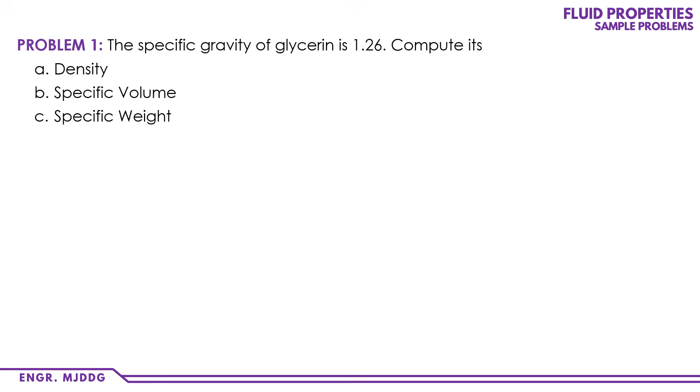So we can write unit weight of glycerin equals 12,360.6 Newton per cubic meter. This is the answer for letter C.

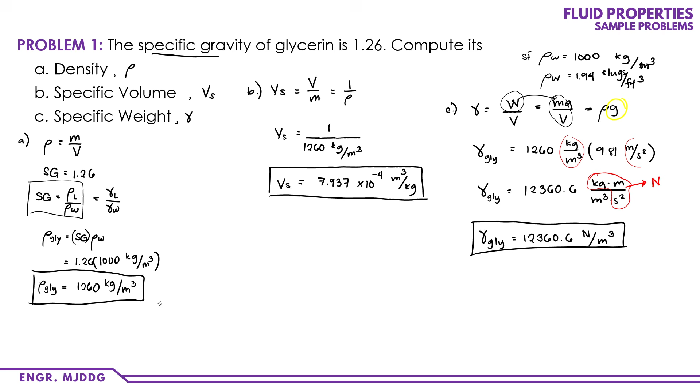Now for number 2: A cylindrical tank, 80 cm in diameter and 90 cm high, is filled with a liquid. The tank and liquid weigh 420 kilogram, and the weight of the empty tank is 40 kilogram. What is the unit weight of the liquid in kilonewton per cubic meter?

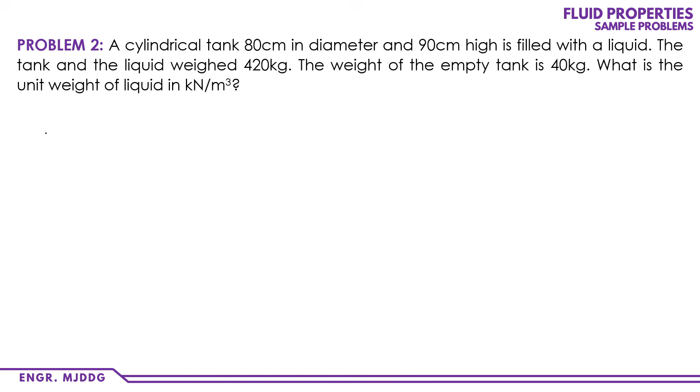First, let's draw our cylindrical tank. The height is 90 centimeter, and the diameter, meaning the full width, is 80 centimeter. Note that when you see the Greek letter phi in our solving, it stands for diameter.

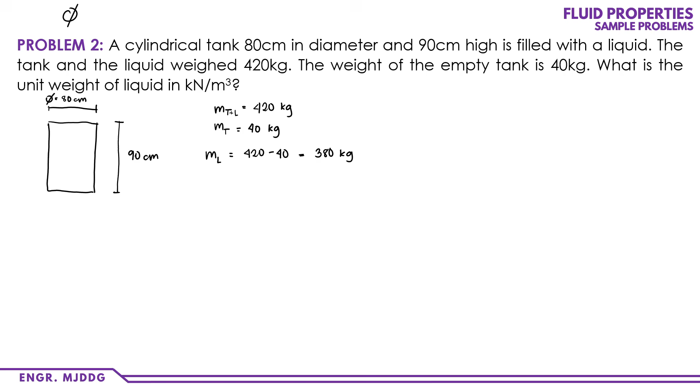Meron tayo ditong volume. Ano ba pinapakuha pala? Unit weight. So ang unit weight natin ay weight over volume. So kailangan natin kunin si volume.

Yung volume ng liquid natin ay, ano ba to? Cylinder. Pi over 4 D squared. So ito yung ating formula for the circle sa baba, di ba? Then ito times natin ng height para maging volume.

So pi over 4 D. So yung d natin, naka-centimeter, gawin pala natin siyang meters. So convert lang natin, cm to meter.

0.8. 0.8 meters. Then ito naman ay 0.9 meters. Okay, so 0.8 squared times 0.9.

So ang V natin dito is, so pag kinumpute nyo, 18 pi over 1, 2, 5. Or...

0.452 cubic meter. Okay, so salpak na natin yan sa formula. Pero kasi yung sa formula natin, weight. Pero alam naman natin na ang weight ay mass times the acceleration due to gravity over V.

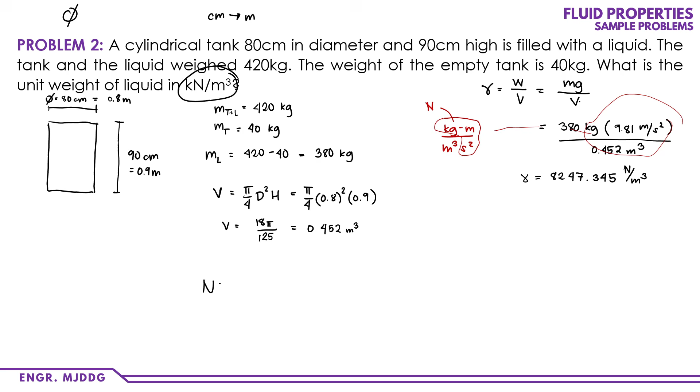So kailangan convert natin si Newton into kilonewton. So ang 1 kilonewton, ang 1 kilonewton ay 1,000 newtons.

So ang gagawin lang natin dito, sulat ko na lang dito sa baba. 8247.345. Ayan, kadugtong niya.

Newton per cubic meter. So sabi natin, pag nagko-convert tayo, yung nasa baba ay yung ika-cancel. So Newton over 1 kilonewton. So 1,000, divide lang natin siya ng 1,000 para maging

8.247 kilonewton per cubic meter. So tinatlo ko na lang yung decimal places. Okay?

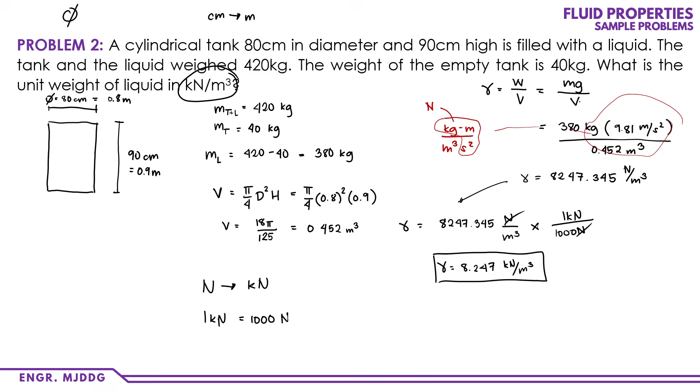Number three, find the mass density of a gas at a temperature of 8 degrees Celsius and a pressure of 190 kPa gauge. Use gas constant equal to 2079 joule per kilogram Kelvin.

So mass density daw ng gas. Ilan na to? Ay wait, napindot ko. So kapag mass density yung pinag-uusapan natin, yung gas, or kapag gas yung pinag-uusapan natin, ano na yung formula natin dito?

Yung sa may ideal gas, naalala nyo ba? Yung ideal gas na formula natin, which is, the density is equals to P abs. Parang sira na tong pentab. P abs over RT. Okay?

Then ang binigay na pressure sa atin is gauge. Pero dito, P abs dapat. Ano yung formula natin to convert gauge into absolute pressure?

So meron tayong P gauge. P abs is equals to P gauge. Parang may nagpipindot-pindot na dito. P gauge plus P ATM or the atmospheric pressure.

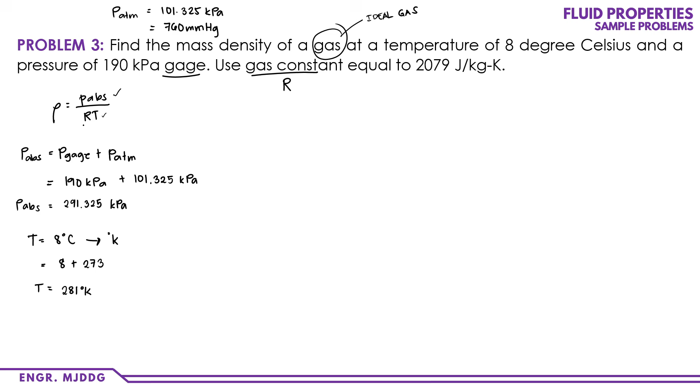Okay, so meron na tayong P-abs, meron na din tayong T, and then si gas constant natin, which is si R, and check natin yung unit, joule per kilogram Kelvin, which is yun talaga dapat yung unit ng R natin. So pwede na tayong magsalpak ng given.

So density is equals to 291.325 kPa. Pero sabi natin sa formula, dapat si absolute pressure ay naka-Pascal.

Kaya magta-times tayo ng 10 raised to 3 para maging Pascal. So alisin ko na to. Magiging 291.325 times 10 raised to 3 Pascal.

Over, saan na yun? 2079 Joule. Ano ba yan?

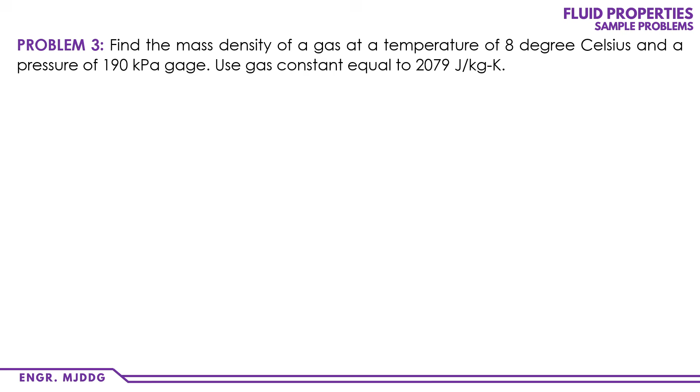Joule per kilogram Kelvin times 281 Kelvin. So, ang density natin ay 0.499 kilogram per cubic meter.

Sana sinasabayan nyo kung mag-calculate dyan. So cancel kasi ito, napakita ko ba? Feeling ko sa ibang section di ko napakita. So kita natin, si Pascal, ano na ulit si Pascal?

Pascal is Newton per square meter. Then si Joule, ano si Joule? Joule, dito, Newton meter. Then kg, Kelvin. Then times natin sa Kelvin. So cancel si Kelvin. Magiging Newton per meter squared times kg over n m.

So magiging cancel ang n, then kg over cubic meter. So ito yung ating unit for density.

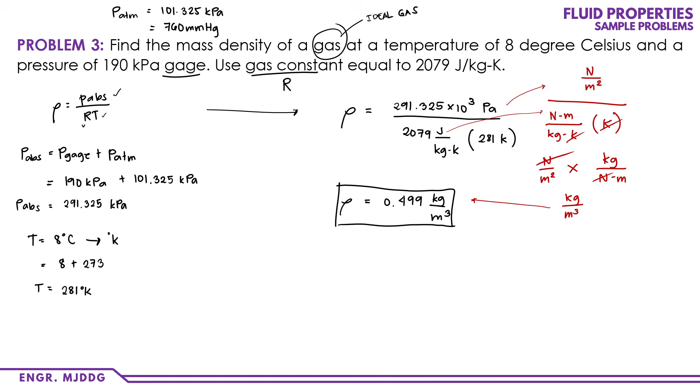Okay, so next problem, problem number 4. A gallon of water weighs 5 pounds. Compute its mass in kilogram, mass in slug, and volume in cubic feet. So note that 1 gallon is equals to 3.785 liters. Napansin nyo dito sa problem, puro gumamit ng English unit.

So we will solve this problem using English system. Okay, so for letter A, mass. Ang 1 kilogram ay 2.2 pounds. So ang mass, hinuhanap natin, conversion lang pala to. Mass is equals to 5 pounds times, so ang nasa ilalim is yung ika-cancel natin, 2.2 pounds, so 1 kg. Cancel si pounds, magiging M is equals to 2.273 kg.

Next, letter B, mass in slug. So 1 slug natin ay equal sa 14.59 kilogram. So mass is equals to 2.273, yung nakuha natin kanina, kilogram. Then nasa ilalim yung ika-cancel, 14.59 kilogram, ito ay 1 slug. So cancel, magiging M is equals to 0.156 slug.

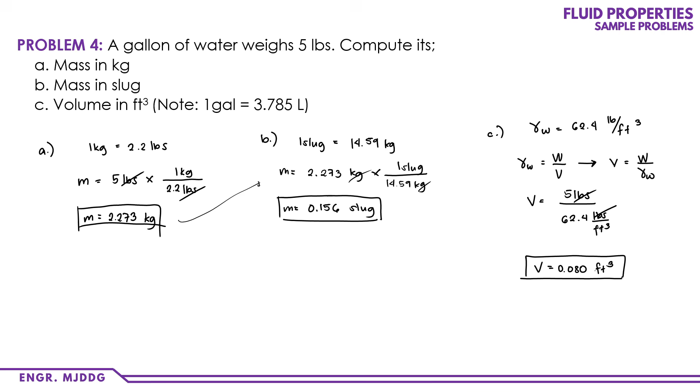Okay, so for number 5, a liquid compressed in a container has a volume of 1 liter at a pressure of 1 MPa and a volume of 0.995 liter at a pressure of 2 MPa. The bulk modulus of elasticity of the liquid is... so ang tinatanong sa atin is the bulk modulus of elasticity.

So ano na nga ba yung formula natin for bulk modulus of elasticity? This is EB is equals to 1 over beta, or the compressibility. Ang formula natin dito is the negative change in pressure over change in volume over volume. Ipaklaro lang natin, ang sabi natin is kapag change, ang pinag-uusapan natin, it is the final minus initial. So sulat nga muna natin yung ating given.

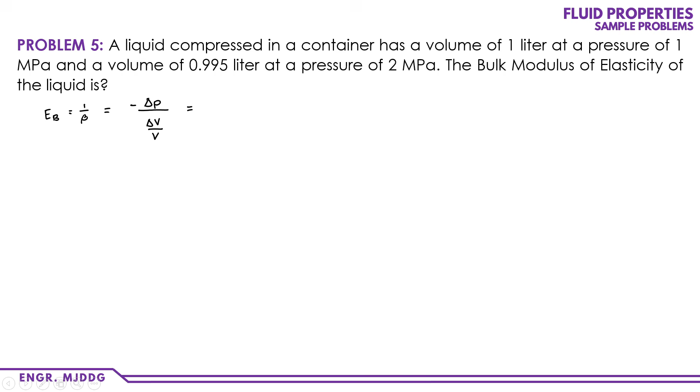Ang V1 natin is 1 liter. Ang V2 natin ay 0.995 liters. Ang P1 natin or initial pressure natin si 1 MPa. And then the second pressure, or P2 natin, final pressure pala, sorry. So the final pressure is, ang sabi niya, 2 MPa. Salpak natin sa formula, o i-expand muna natin yung formula. Since change yan, ang pinag-uusapan, it is the final or P2 minus P1, over V2 minus V1 over V.

So itong V natin, ano to? This is the V1. So negative 2 minus 1 all over V2 natin, 0.995 minus 1, over 1. Cancel natin dito, ito ang unit natin MPa, ito naman ay liters, then liters. So cancel, cancel, ang matitirang unit ay MPa. So compute natin, dapat ang lalabas is 200 MPa. So ito yung problem number 5 natin.

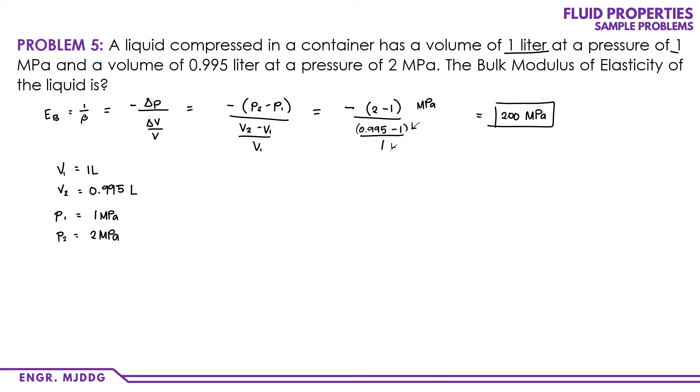So for number 6, water in a hydraulic press initially at 137 kPa absolute is subjected to a pressure of 116,280 kPa absolute. Using EB is equals to 2.5 GPa or gigapascal, determine the percentage decrease in the volume of water.

So wait, may open ko lang yung module natin. So ito, yung tinutukoy na percentage decrease.

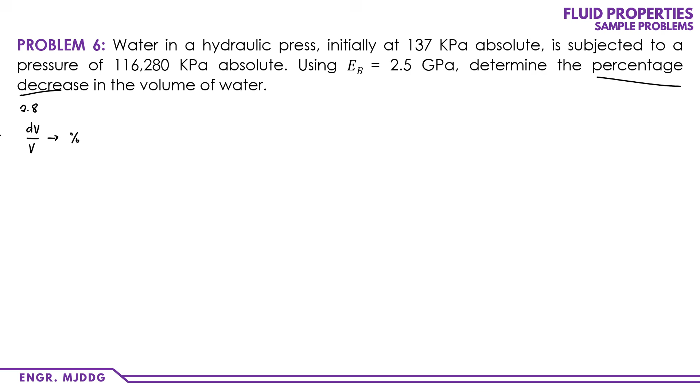So kung babalikan natin yung formula natin dito, ang formula natin is sa EB ulit, and then sa compressibility. Sabi doon sa 2.8, paki-check po yung handouts nyo sa 2.8, ang dV over V ay change in volume per unit volume, and usually it is in percent daw. So ito, tinatanong sa problem, percentage decrease. Malamang, ang kailangan nating hanapin is dV over V, or the change in volume over V. Ang formula na gagamitin natin dito is EB pa rin.

Pwede din compressibility. Pero EB pala yung given. So EB, EB is equal to 1 over beta, or negative change in pressure over change in volume over volume.

So ang dV over V, same lang po yan sa change in volume over V. Diba sa derivative, kaya dx yan? Dx is change in x. So same lang po yan ha. Ito, since ito yung pinapahanap,

So lipat natin, change in volume over volume is equal to negative change in pressure over EB. So equals negative change in pressure.

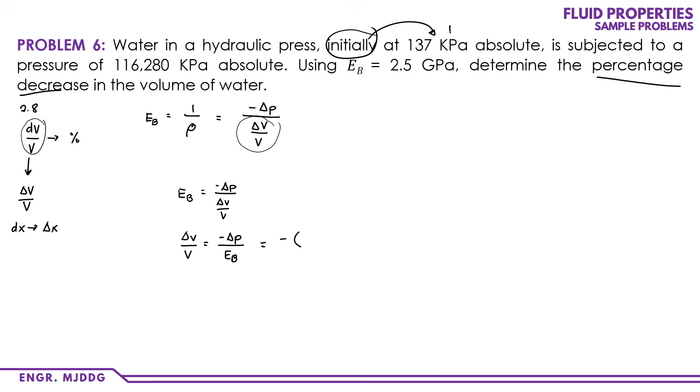So sabi niya initially, ibig sabihin ito ay P1 na. Then ito si P. So 116,280 minus 137 kPa over 2.5 times 10 raised to 6 kPa.

So bakit 10 raised to 6 yan? Kasi sulat ko dito, ang Pascal, ang kPa ay ilan? 1,000 Pascal. Ang MPa ay 1 million Pascal. Ang GPa ay 1 billion Pascal. So kapag ginamit natin to,

Ito magiging 10 or times 10 raised to 3. Ito naman ay times 10 raised to 6. Ito naman ay times 10 raised to... ano to? 9. So ito, times raised to 6 lang yan kahit sinabing GPa.

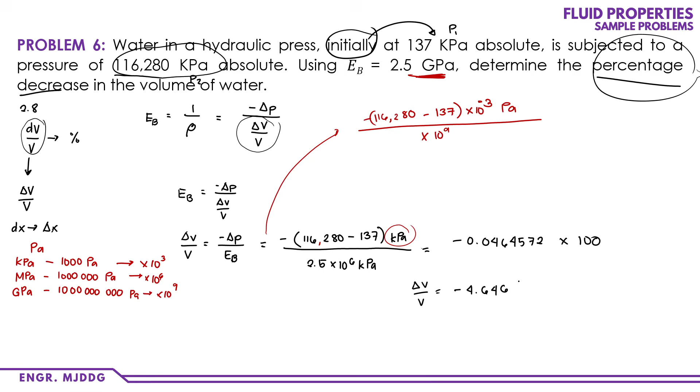Okay, so ito magiging negative 0.046457, since percentage yung hinahanap, times 100. So dV or the change in volume over volume is equal to negative 4.646%. So negative yan, huwag niyong aalisin yung negative. Bakit? Kasi sabi niya decrease, so tama yung sagot natin. Nagdi-decrease siya, kaya negative. Okay?

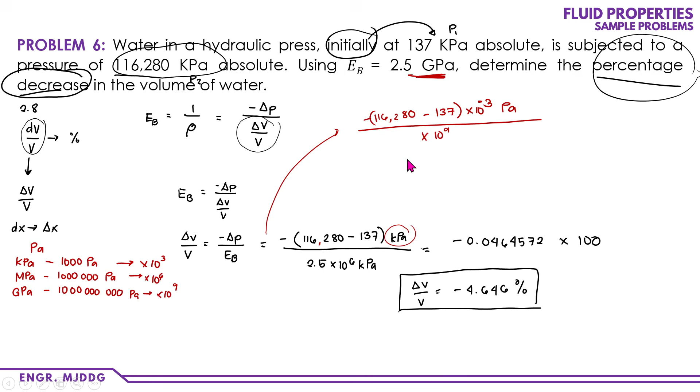Okay, so tuloy natin. Saan na ba ako? Number 7. If the viscosity of water is 0.00402 poise and its specific gravity is 0.978, determine its absolute viscosity in Pascal second and its kinematic viscosity in Stokes. So ang given natin dito is

viscosity, viscosity is mu, 0.00402 poise. So ngayon ano pa? SG. SG natin is 0.978. So ang A natin, determine daw yung absolute viscosity in Pascal second.

So yung poise, i-convert lang natin siya into Pascal second. Ano na yung pinatandaan ko sa inyo? Ang 1 poise ay equal lang yan sa 0.1 Pascal second. And ang 1 Stoke ay equal yan sa 0.0001... ano na yan? Meter squared per second. Ba't red na pala gamit ko? Okay, so convert lang natin si poise into Pascal second.

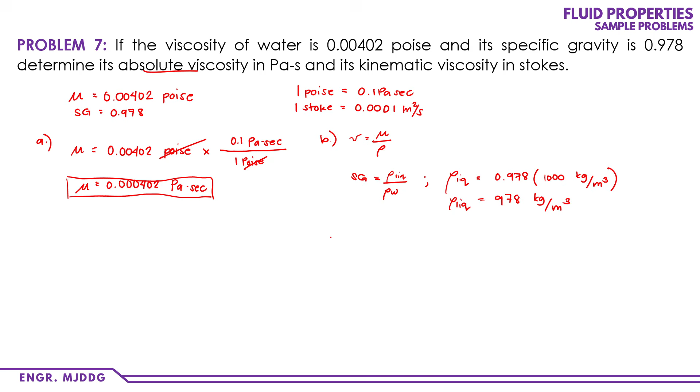Okay, so isalpak na natin sa formula. Density, kinematic viscosity is equal to mu natin 0.000402 over 978 equals 4.110 times 10 raised to negative 7.

So ano yung kanyang unit? Unit natin dito ay meter squared per second. Paano? Saan na ba yun? Kung itong kanina, pascal over kg over meter cube. So ang Pa natin is Pascal natin, Newton per square meter, times seconds. Ang kilogram, ay wait, mali.

Tama, kg over cubic meter. Tapos N sec over m squared times m cube over kg. So cancel, magiging Newton meter second over kilogram. Tama ba?

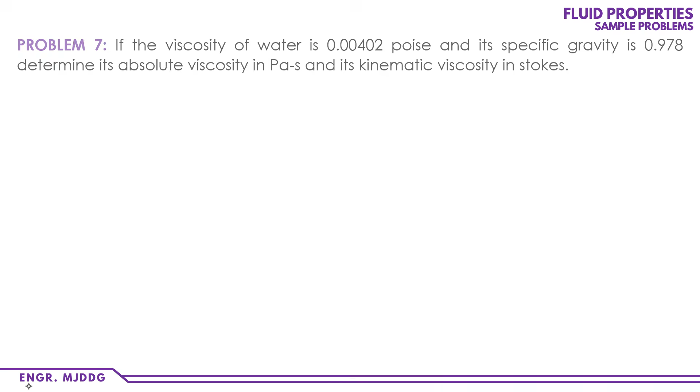So ayusin ko lang. Since nasa denominator si seconds, magiging kg m times seconds. Tapos yung isang seconds na ito, nasa baba na yan. So magiging s, then kg. So ang makakancel lang po dito ay si kilogram. Tapos ba't na-cancel si seconds?

Wait, may mali ata talaga. Dito na lang ako sa gilid.

So, Pascal seconds over kg cubic meter, magiging Newton per square meter. Seconds over kg over cubic meter. Pag tinimes natin to, N over m squared seconds times m cube over kg. So cancel natin si m na dalawa, so m na isa na lang. Kaya magiging N s m over kg. N s.

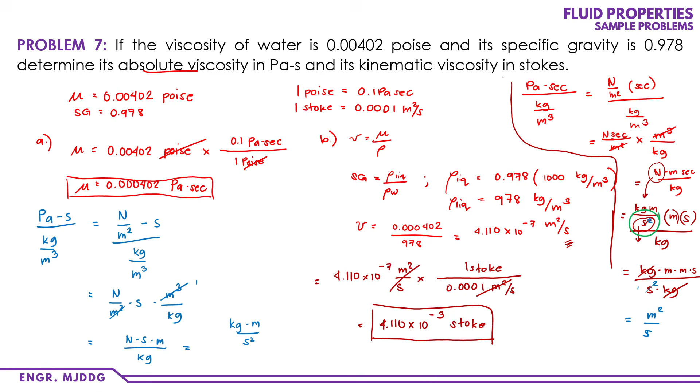So ngayon, problem number 8. Two large plane surfaces are 25 mm apart and the space between them is filled with a liquid of viscosity mu equal to 0.958 Pascal seconds. Assuming the velocity gradient to be a straight line, what force is required to pull a very thin plate of 0.37 meters squared area at a constant speed of 0.3 meter per second if the plate is 8.4 millimeters from one of the surfaces.

Okay, so i-draw muna natin to. So meron tayong two large plane surfaces, so ito yun. So ito fixed plate ito, or fixed plane. Yan, so ngayon, yung plane daw na yan, meron daw liquid dito sa gitna.

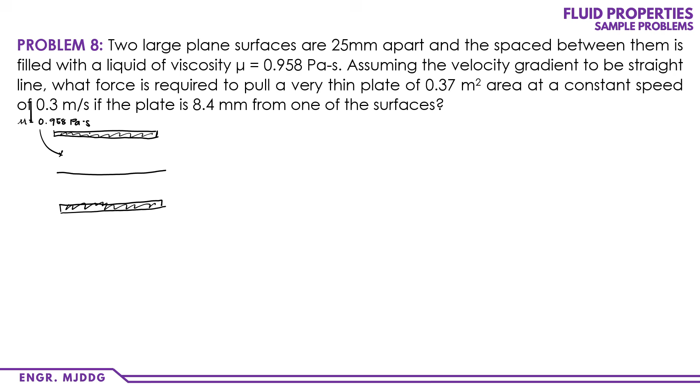O dito sa pagitan nilang dalawa. And ang viscosity niyan ay 0.958 Pascal second. Then ano pa? Assuming daw meron tayong very thin plate dito sa gitna. Yan. Then yung distance niya daw from one of the surface, so pwedeng pagbaliktad to, 8.4 millimeters. Tapos dito sa taas naman, since ito yung distance nilang dalawa, ang distance nilang dalawa ay 25 mm. So pag minus nyo lang yan, 25 minus 8.4 ay 16.6. So itong isa, 16.6 mm.

So ngayon, what force daw ang nire-require to pull this very thin plate? So F natin, at a constant speed of 0.3 meter per second. So ang area ng plate natin ay 0.37 meters square meter. Ang U natin or the velocity ay 0.3.

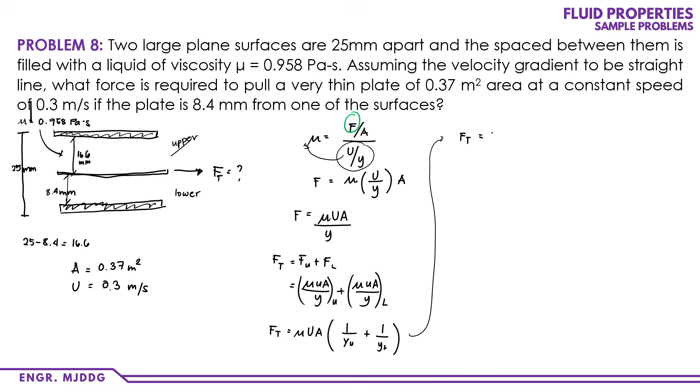Okay, so sa pagsalpak ng formula, salpak natin, magiging Ft is equals to, ano yung mu natin? Mu natin, ito, 0.958 Pascal second times ang U natin ay 0.3 meter per second. Then 0.37 meter squared yung area natin. So ito yung mu, ito yung U, ito yung area. Then ang ita-times natin dito, so katuloy niya lang times 1 over, ano yung distance natin, ano yung thickness natin sa upper? 16.6 mm. Pero kung titignan nyo, naka-meters tayo lahat. So ano yung 16.6 mm sa meters?

0.0166 plus 1 over 0.08, ay kulang pa, 0.0084. So calculate nyo lang po yan, dapat ang lalabas ay 19.065 Newton.

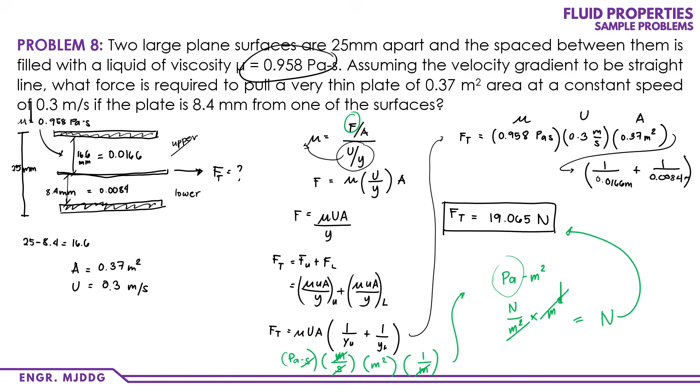Okay, so number 9. Ilang minutes na to? 56 minutes. Sa number 9: what is the value of the surface tension of a small drop of water, 0.3 mm in diameter, which is in contact with air if the pressure within the droplet is 561 Pascal? Considering surface tension to be constant, what is the minimum diameter if the pressure in a droplet is limited to 400 Pascal?

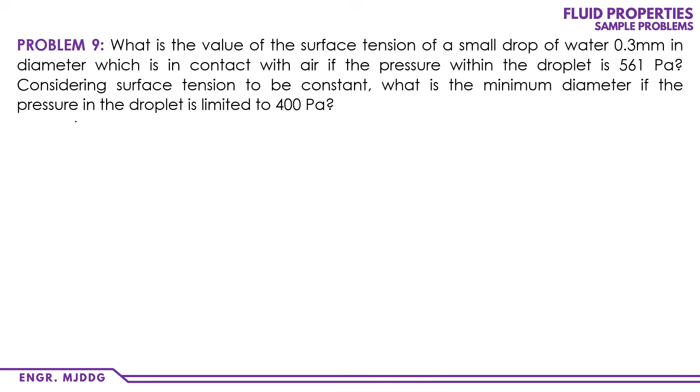So pressure in a droplet pala to. Ano na yung formula natin for the pressure in a droplet? Pressure is equals to 4 sigma over D. Ano ba yung mga given? Pressure natin ay 561 Pascal. Tapos ano pa yung given? Yung diameter, D natin ay 0.3 mm. Kapag ginawa nating meters to ulit, magiging 0.0003 meters.

Ano ba pinapahanap? Ang pinapahanap ay surface tension, yung sigma. Ayusin natin tong formula, magiging PD over 4. So sigma is equals to PD over 4. Sigma: 561 Pascal, sulat ko na nga dito, 561 Newton per meter squared. Diameter natin is 0.0003 meters, over 4. Cancel C, isang M. So ang surface tension natin is... ilan na yun? 0.042075 Newton per meter. Since 3 decimals tayo, pwede na siguro yung surface tension na 3.

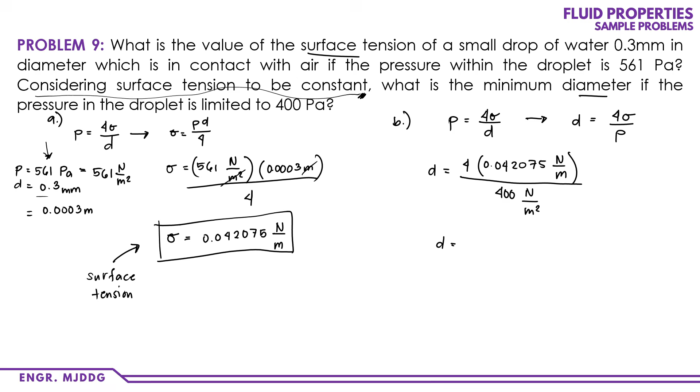Ang letter B natin is P is equals to 4 sigma over D. Diameter pinapahanap, kaya D is equals to 4 sigma over pressure. D natin ay 4, ang sigma natin is 0.042075 Newton per meter, over P natin, sabihin P natin, 400 Pascal. O ano na ba yung Pascal natin? Newton per square meter. So D natin is ano? Wait, naka-mm pala yung sa solution ko. Wait, compute ko muna in meters. Okay, saan na yun?

4.2075 times 10 raised to negative 4. Ito po naka-meters, kung gagawin yung millimeters times nyo sa 1,000, magiging 0.402 or 3. Sige, lagay ko na nga muna 0.42075 mm. So ito yung minimum diameter ng pressure... minimum diameter pala ng droplet.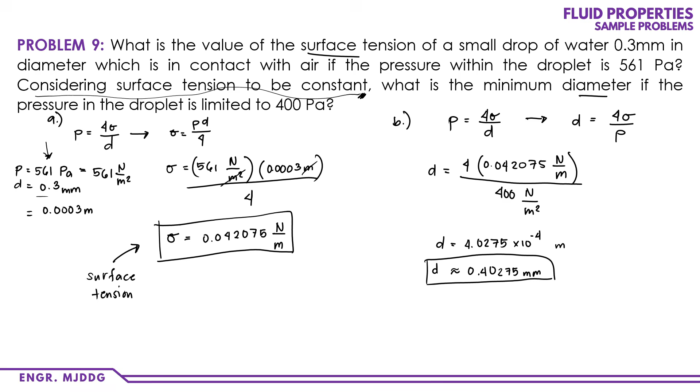Okay, second to the last problem. Distilled water stands in a glass tube of 9 millimeters diameter and a height of 24 millimeters. What is the true static height? Surface tension is equals to 0.0742 Newton per meter. Ito, glass tube ang pinag-uusapan natin. Ano yung property yung kailangan natin dito? Or yung sa capillarity, tama?

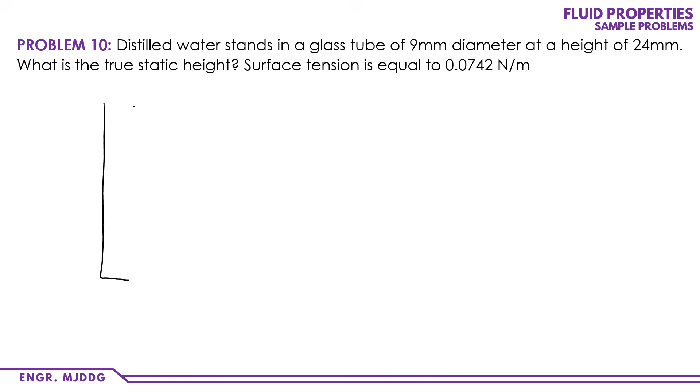So meron daw tayong glass tube. Ngayon, ang diameter niya ay 9 mm, o sa meters ay 0.009 meters. Then ano pa to? Yung height daw ng water ay, so for example, meron tayo ditong water, nakaganyan kunwari. Yung height daw na to ay 24 mm. Ngayon, tinatanong, what is the true static height?

Ano ba yung true static height natin? Yung true static height po natin, based sa figure natin, ito lang po yun, yung sa may baba nung curve ng water. So this is the HTS or the true static height. Then ano naman 'to, ano 'to? Itong part na 'to, yan yung ating HC, o yung height ng capillary natin, o yung capillary rise, capillary fall, parang gano'n.

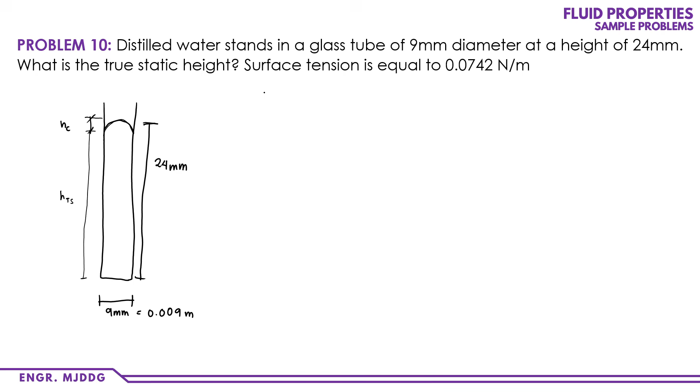Okay, so yung formula natin, HC is equals to 4 sigma cosine theta over gamma water. So sabi niya, distilled water.

So, salpak natin, nakuha ko na ba? 0.024 meters. Let's plug it into the formula, 4 sigma, ay sigma, may binigay pala. So, 4 times 0.0742 Newton per meter.

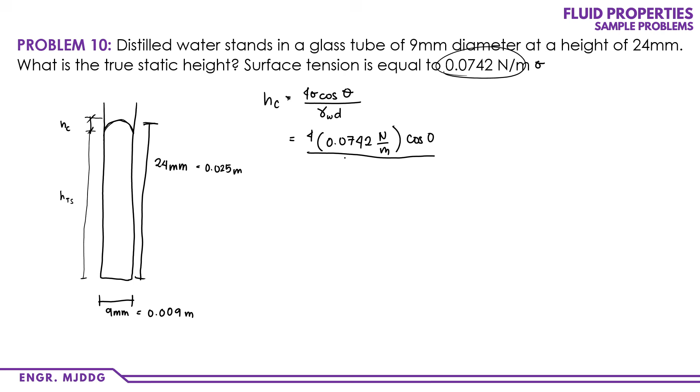So, cosine 0 over gamma ng water natin. Since naka-Newton, anong gagamitin nating gamma ng water? Yung 9,810 Newton per cubic meter. So, bakit yan? Yung isa, di ba yung 9.81 kN per cubic meter. Since naka-Newton naman tayo, pare-pareho, so mag 9,810 Newton per cubic meter tayo. Times the diameter is 0.009 meters. So, this cosine 0 is 1.

So, ang magiging sagot natin dito sa HC, 3.362 times 10 raised to negative 3 meters, or kapag mm ay 3.362 mm. Ngayon, ang tinatanong sa atin, true static height.

So, based sa figure, ang true static height natin ay 24. So, itong buo, minus natin nitong HC. So, yun yung true static height, di ba? Kita nyo ba sa figure? So, HTS is equals to HT, sabi natin yung total height, minus HC. So, HT natin is 24. 24 mm minus 3.362 mm. So, ang HTS natin ay 20.638 mm.

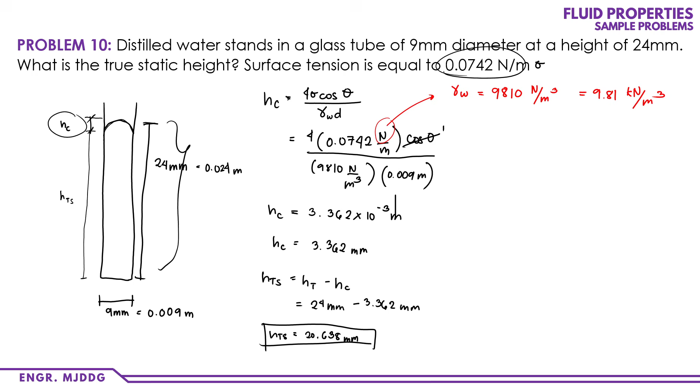Okay? So, last problem. A sonar transmitter operates at 2 impulses per second. If the device is held to the surface of fresh water with bulk modulus of elasticity of 2.04 times 10 raised to 9 Pascal, and the echo is received midway between impulses, how deep is the water?

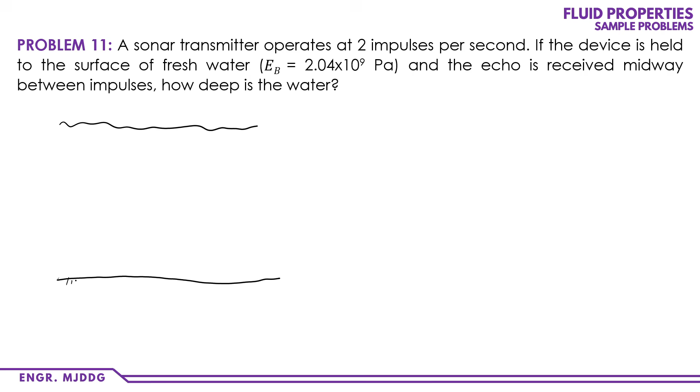So, drawing natin. So, meron tayo dito. Anong klaseng tubig ba to? Fresh water. So, ito yung ating ocean floor o river. Kung anong tubig yan. So, ngayon, 2 impulses daw per 1 second. 1 impulse. Ibig sabihin, 1 impulse ay ilang segundo? 0.5 second. Tama? Kung ang 2 impulses daw per second, kung 1 impulse lang, 0.5 second.

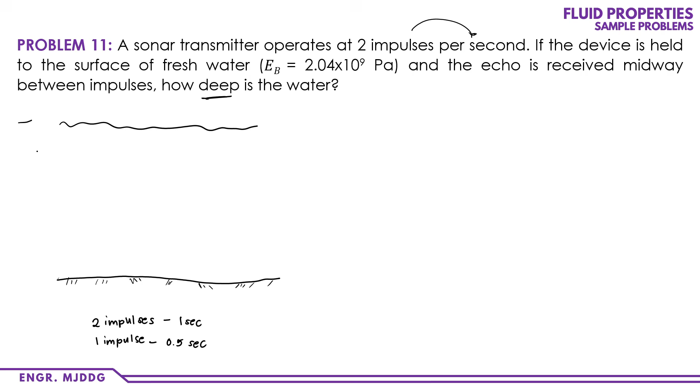Ngayon, pinapahanap sa'tin kung gaano kalalim yung tubig, which is ito. So, H. Drawing nga natin. So, andito ka, tapos nag-send ka ng signal sa baba ng tubig or dito. Gaano kabilis yung pagsisend mo? 2 impulses per 1 second daw. Ngayon, bumalik daw or nag-echo daw yung nirelease mong wave or signal.

So, bumalik na siya. So, pagbalik niya, kada dalawa, nasa gitna yung dalawa. Gets nyo ba? Saan na ba yun? So, the echo is received midway between impulses. So, between ng 2 impulses, yung isang echo na re-receive nyo.

So, may kulang sa drawing ko. Yung drawing ko dati. Sirena. Ay, isda yan eh. Sirena.

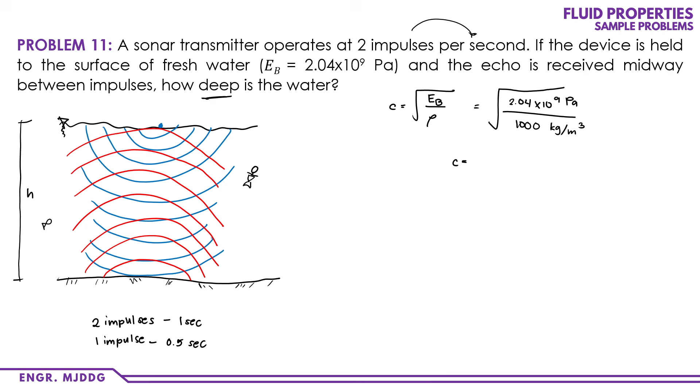So, C is equals to 1428.286 meter per second. So, paano naging meter per second na naman yan? Yung Pascal natin ay Newton per meter squared over kg over cubic meter. So, ang Newton natin ay kilogram meter per second squared. Tapos yung m natin na isa, so 1 over m squared over kilogram per cubic meter. So, cancel.

Or ayusin na lang muna natin. Ayusin natin, magiging kgm over m squared s squared times m cubed over kg. So, cancel si kg, cancel si m na isa. So, magiging m na lang dito. Meron pang m dun, no? So, m squared over s squared. And square root yung sa formula natin, kaya magiging m over s. So, kaya m over s yung unit natin for celerity.